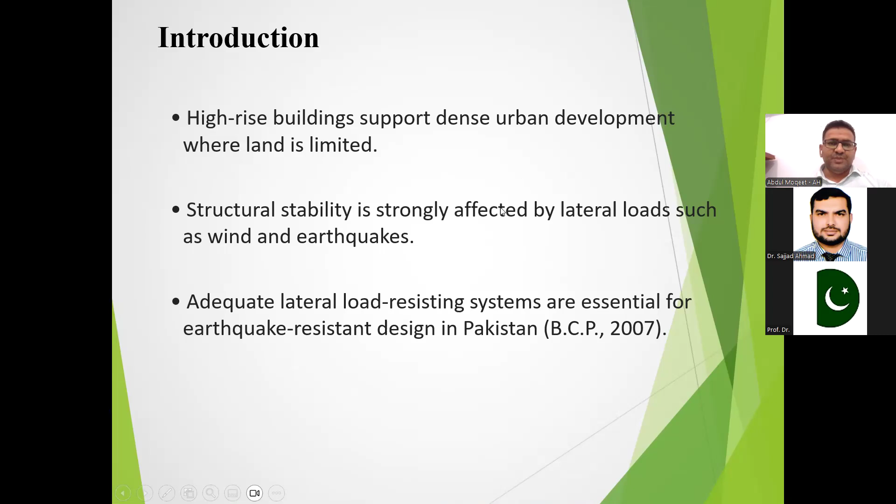If we talk about the history, in the past, the 2005 Kashmir earthquake and 2013 Balochistan earthquake caused too much destruction due to poorly detailed structures. The damage was identified as being caused by inadequate seismic detailing and weak lateral load resisting systems. So now for modern high-rise buildings, there is a requirement for systems like shear walls, bracing, and base isolation so that lateral loads can be resisted properly and transferred to the foundation. Their effects and patterns we will discuss in the next slides.

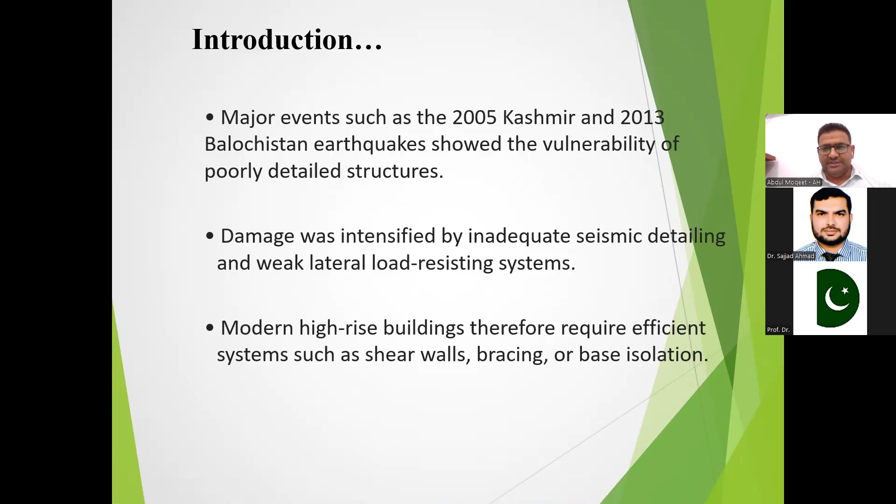Talking about other systems, the shear wall is the most efficient lateral load resisting element in high-rise buildings. They increase structural stiffness, strength, and seismic resistance. They reduce lateral displacement, interstory drift, and improve overall building performance against earthquake and lateral loads.

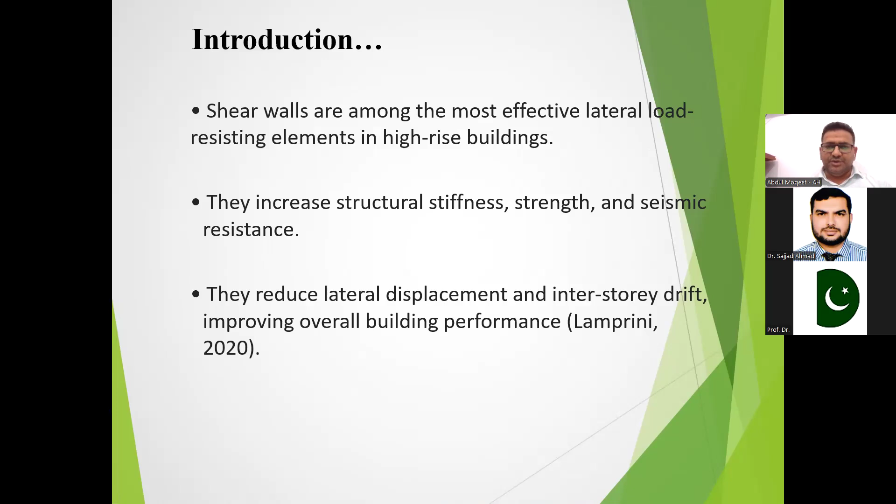The problem statement for my thesis is: this research addresses the critical need to identify the most effective shear wall placement to minimize structural vulnerability in high-rise buildings across different seismic zones.

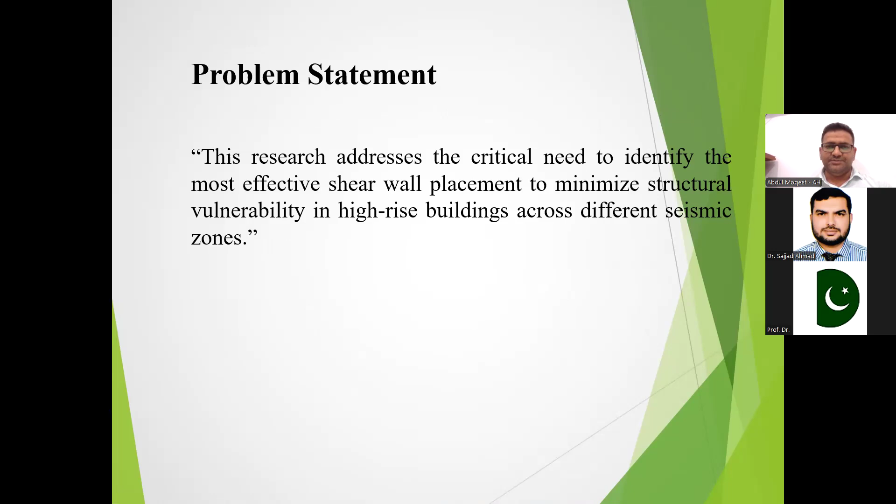There are three objectives. First, we will discuss the placement of shear walls, how they behave and how they react. Then there will be a comparison between all the shear walls in different seismic zones. Finally, there will be a practical recommendation for shear wall location after analyzing all the data.

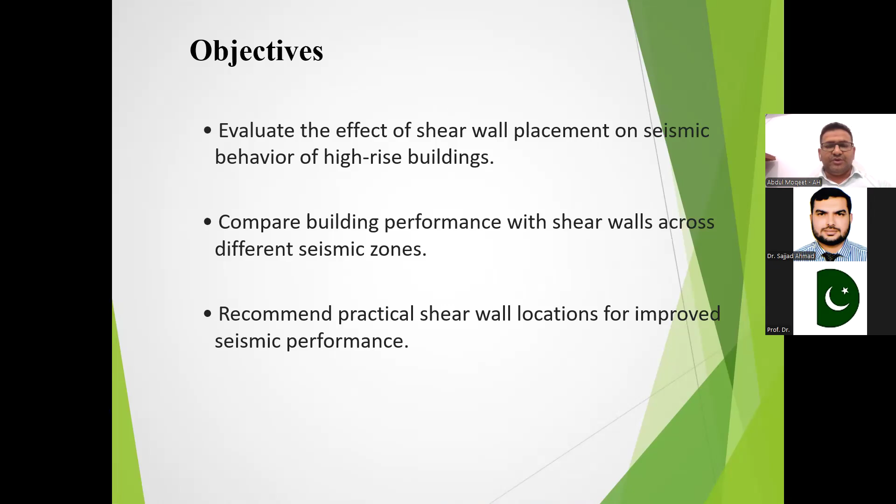If we talk about the shear wall, it is a structure from foundation to the top of the building that transfers the load to the foundation safely, so that there should not be any localized stresses. All stresses can be transferred to the foundation equally and in a proper way, so that there is no potential structural failure.

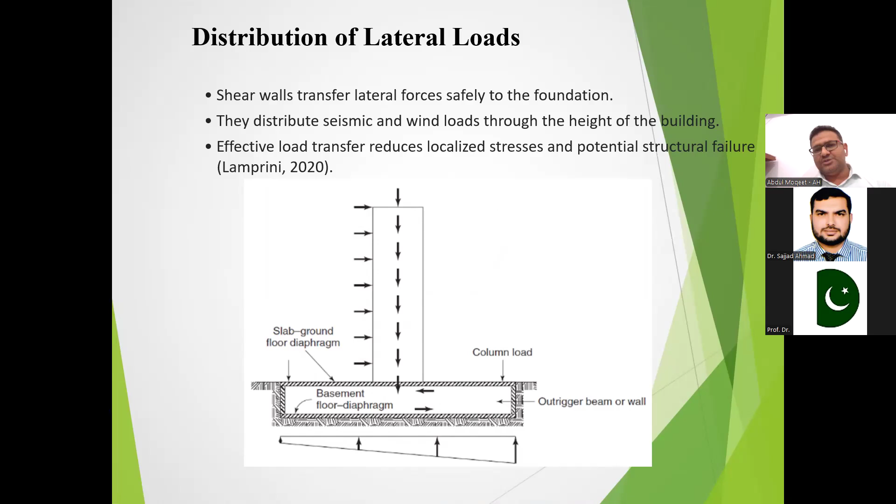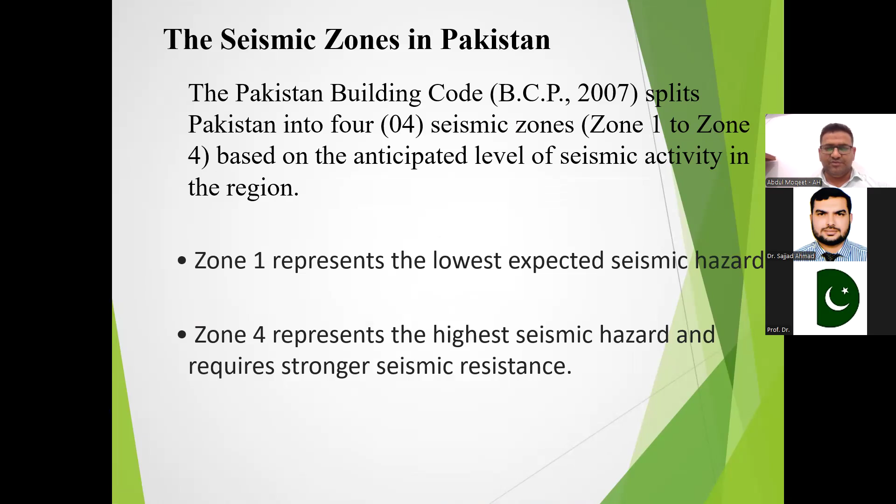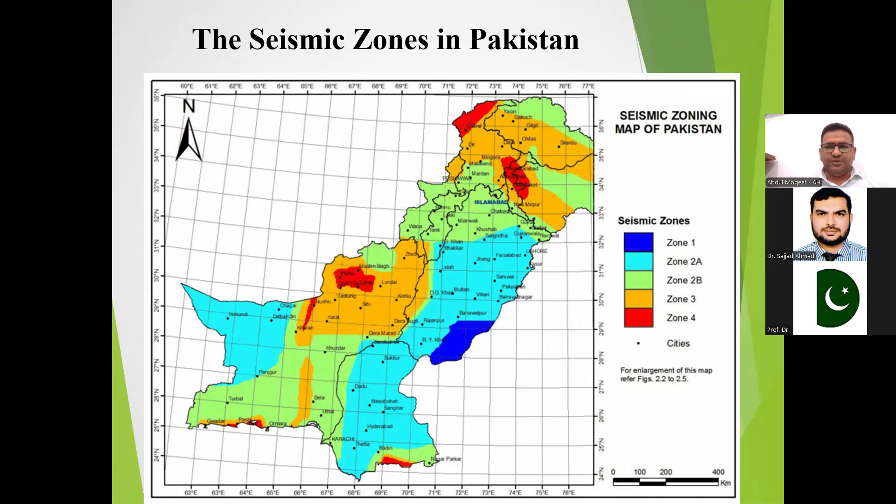Now, about the research methodology, these are the steps we followed. Firstly, we define the building geometry and materials, then define load combinations: ELF and RSA, equivalent lateral force and response spectrum analysis. Then we set seismic zone parameters for zone 3 and zone 4, run the analysis, and extract results for all parameters like displacement, drift ratio, overall drift, shear, acceleration, and stiffness. Then the analysis of results will be shared.

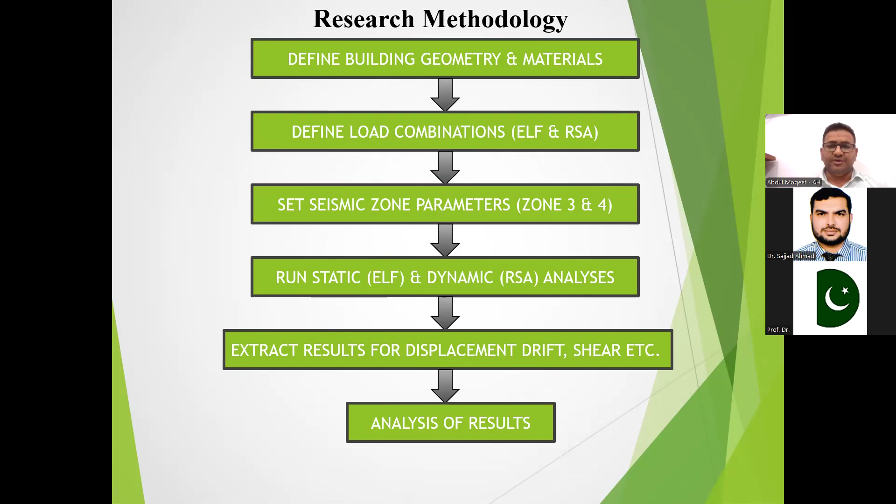Coming to our model: it was defined as a 10-story reinforced concrete building with a rectangular plan, 140 feet by 100 feet, as shown in the photo below. All grids are uniformly distributed in a 20 feet grid in the X and Y directions. Story height is uniform for comparison purposes, 11 feet, with a total height of 110 feet. Column size is 30 by 30 inches, beam is 15 by 24 inches. A rigid diaphragm was adopted for uniform lateral force distribution.

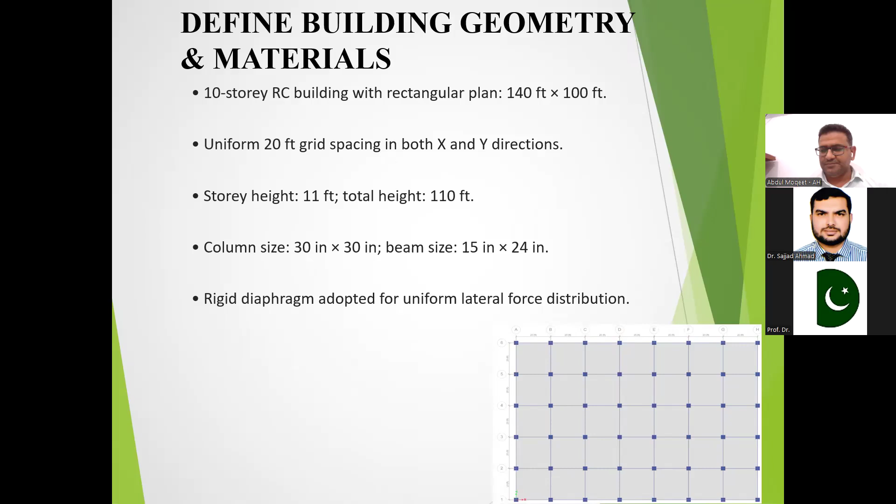These are the three combinations which we will discuss in later slides. The first one is the core shear wall, the second is the edge shear wall, and the third is the corner shear wall. This plan is from the ETABS models.

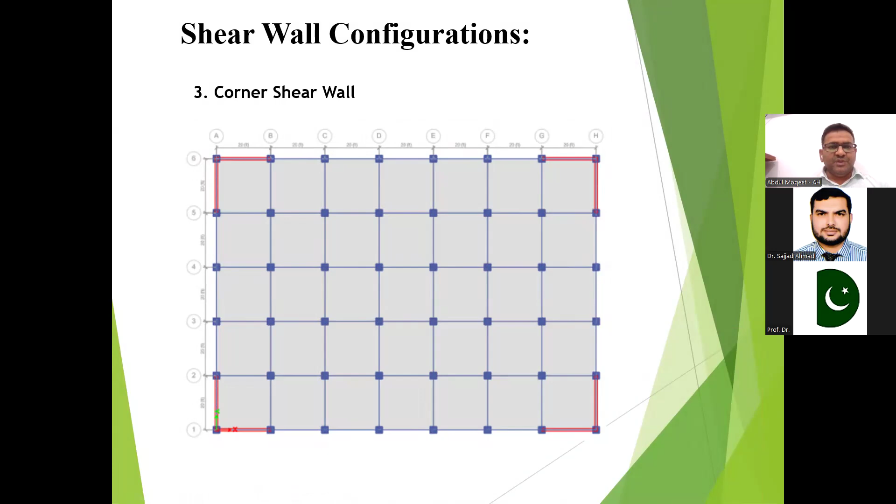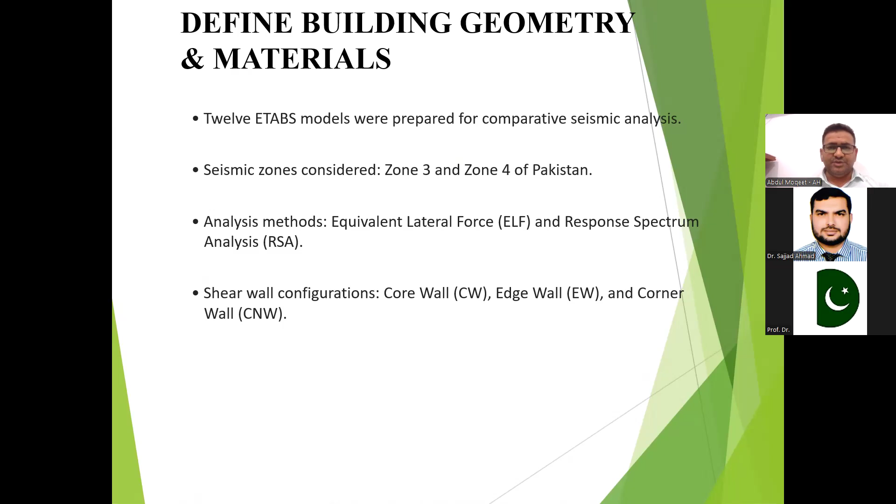So a total of 12 analyses will be performed for comparative seismic analysis. This is for the three combinations of core shear walls, as discussed previously, in two zones of Pakistan, zone 3 and zone 4, using two analysis methods: equivalent lateral force method and response spectrum analysis. All these combinations give us 12 total: first three for zone 3 ELF, next three for zone 3 RSA, then zone 4 ELF, and then zone 4 RSA. Total of 12 structures we will be discussing now.

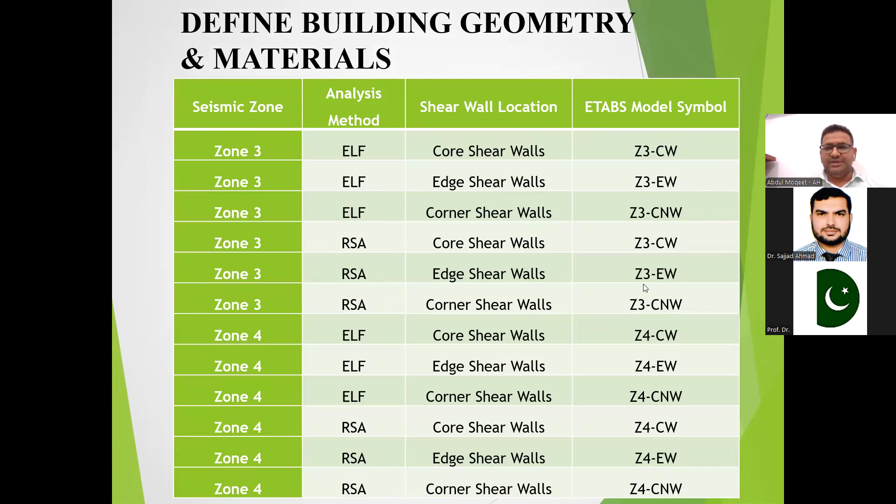Now for the ETABS model, firstly for the equivalent lateral force, ELF, method. Brief introduction: ELF is a simplified static method for estimating seismic lateral forces. Base shear is calculated using CA, the acceleration coefficient, CV, the velocity coefficient, structural weight, and importance factor for this type of building. From an analysis point of view, we have taken importance factor as one, and response modification factor, which ranges from 3.5 to 8.5 - we are taking 8.5 for this one. Forces are distributed to stories according to height and mass, and 5% accidental eccentricity is included to account for torsional effects.

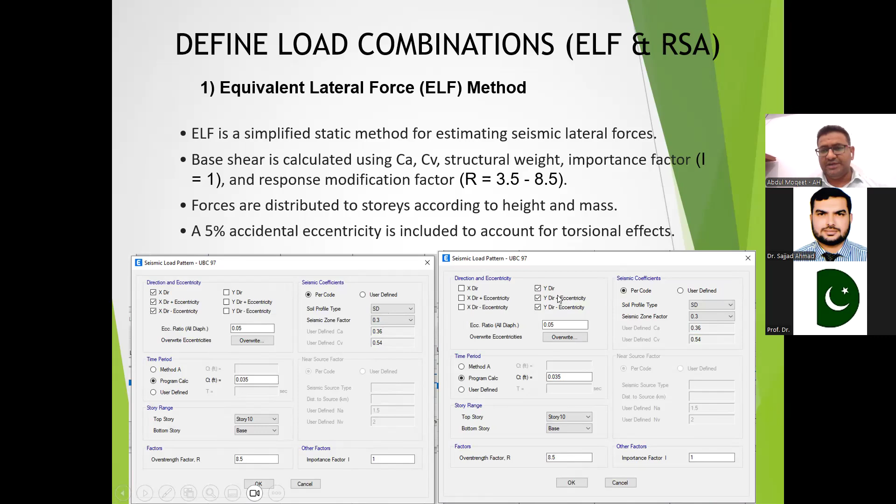Below are the screenshots from ETABS showing all the values: firstly for the X direction for zone 3, soil type SD, with eccentricity ratio 5%, overstrength factor 8.5, importance factor 1. The second is for the Y direction, same for zone 3, then X direction for zone 4, and then Y direction for zone 4. And then we have load case data for EQX and EQY.

Next we'll go to the other definition, response spectrum analysis, RSA. RSA is a dynamic analysis method based on modal response of the structure, like vibration, and CQC patterns which ETABS uses. Natural frequencies and mode shapes are evaluated for seismic response. As per UBC 97 response spectrum parameters, the same values for CA and CV will be applied to have consistency and to compare the values.

Modal combination uses the complete quadratic combination, CQC, method to handle closely spaced modes as generated by the model, and directional combination uses square root of sum of squares to incorporate multi-directional effects. Apart from that, 5% modal damping and 5% accidental eccentricity are included, and RSA gives a more realistic picture of building performance under actual dynamic loading conditions, as it considers time, acceleration, and modal analysis. The orthogonal effect is also considered at 33% of the perpendicular direction, rather than just one direction, which is why it gives a more realistic approach to the model analysis.

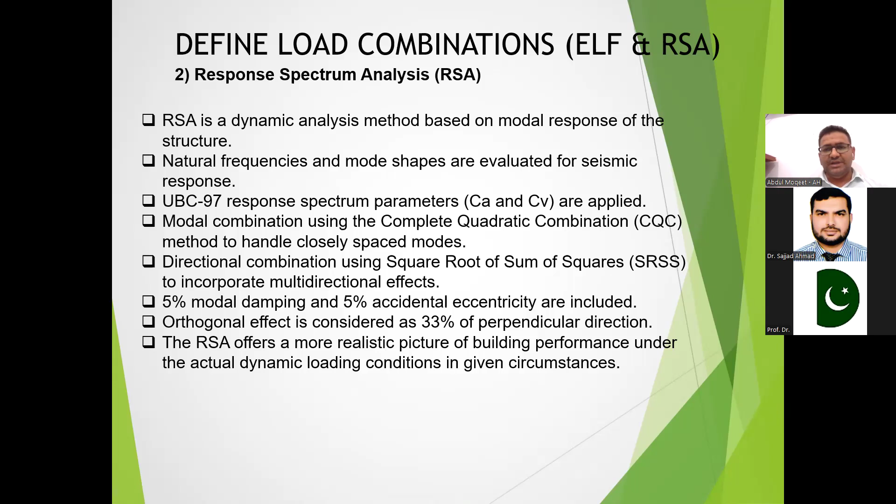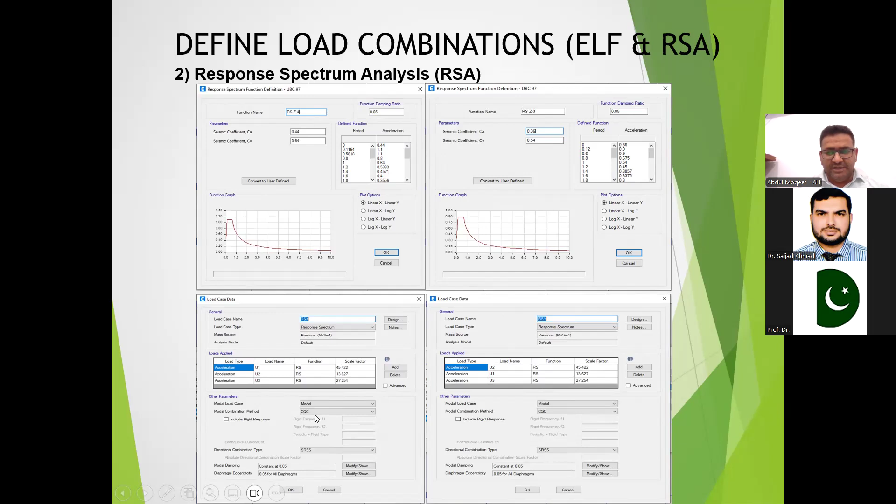So to put the values of RSA into the system, the same values of CA and CV are used for zone 4, and for zone 3 this is generated, and then we come to load cases. Three modes are generated here, U1, U2, U3, with the same CQC pattern as per the software.

Then we go for mass source and load pattern configuration. Load pattern is calculated with dead load taken as 1 and live load as 0.25, reduced live load for the mass source. Applied load factors are used to calculate the mass distribution within the structure. Load pattern application is vital to accurately model the seismic response of the building under both equivalent load and response spectrum analysis - these are the factors we use to equally distribute the load in both ELF and RSA analysis.

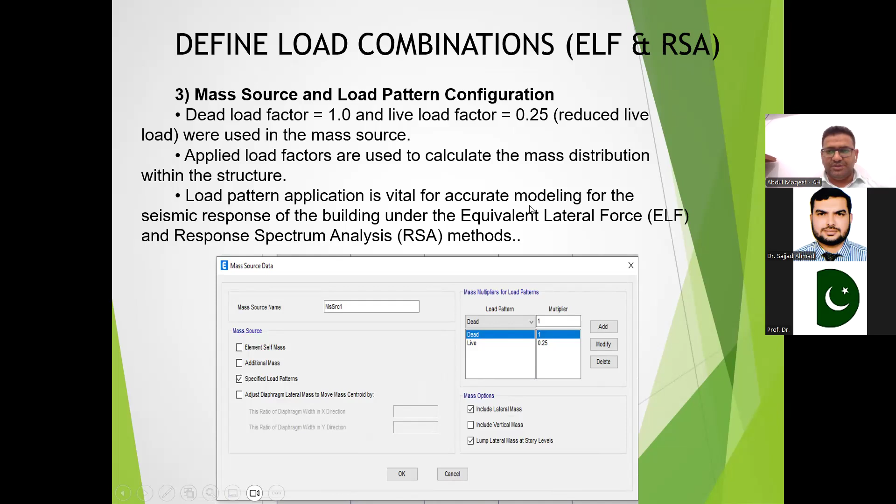Now for the seismic zone parameters: as discussed earlier, zone 3 and zone 4 will be used as per UBC and BCP seismic parameters. CA, as highlighted before, presents the acceleration coefficient, and CV presents the velocity coefficient. For soil type, from a generic point of view, we have chosen the same SD stiff soil, exposure type B, so all parameters remain the same while analyzing the different combinations. Seismic parameters directly influence both ELF and RSA results by altering base shear, acceleration, modal properties, and stiffness - each of which we will discuss in the next slides. These are the values we are choosing.

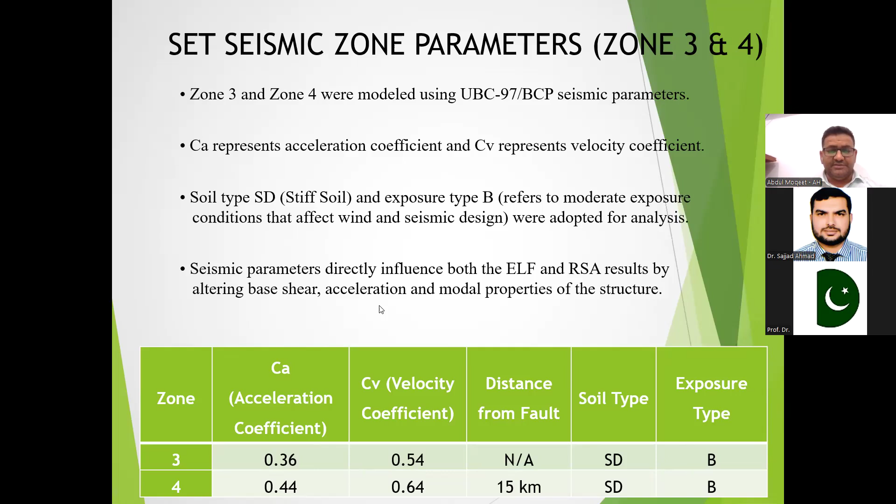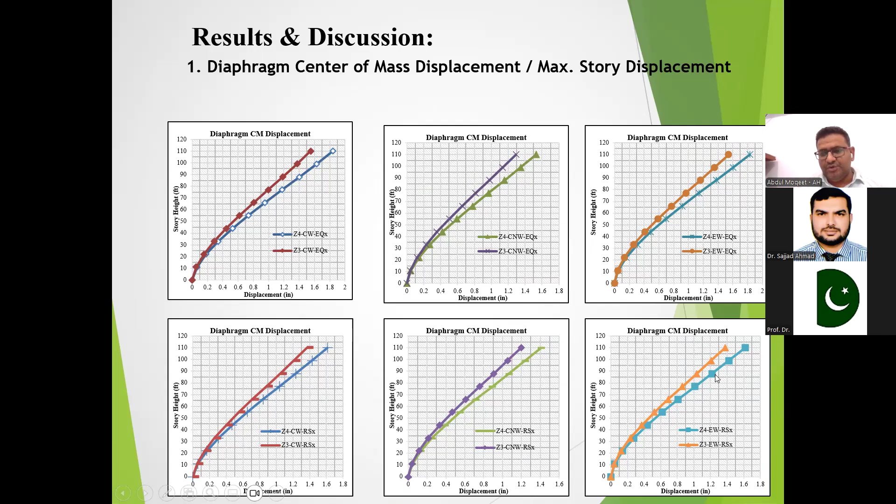Zone 4 is showing more displacement. For this one, same zone 4 is showing more. For edge wall in RSX, the blue line is showing more displacement. So these are all the combinations we have generated.

I will explain briefly for this one. As per our analysis, we understand that corner wall is showing very less displacement. So whenever we compare the corner wall with the other walls, for example this corner wall, the green line is showing less displacement. Even in zone 4, if we compare two walls, corner wall and CNW, corner wall is still showing less displacement.

If we compare all the zones, zone 4 CNW RSX and zone 4 CNW EQX, it is showing less displacement. These are all the combinations which we compared with different zones and different core walls. So in general, we can say corner wall is showing less displacement.

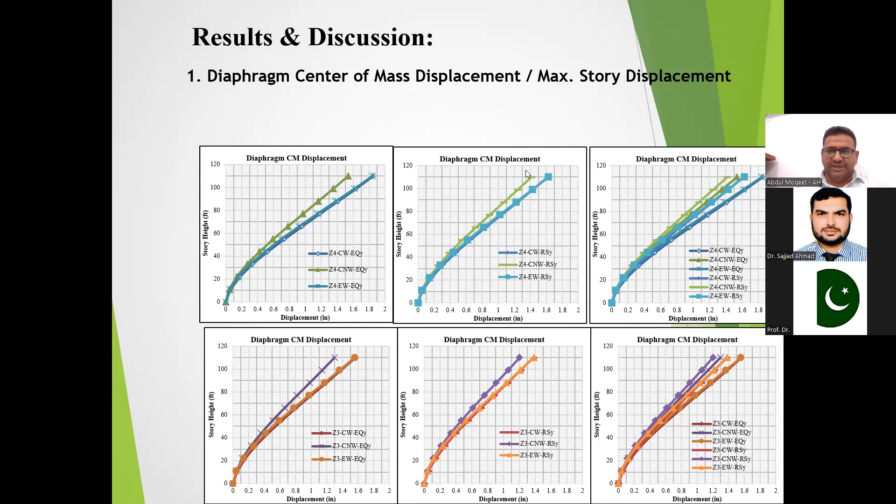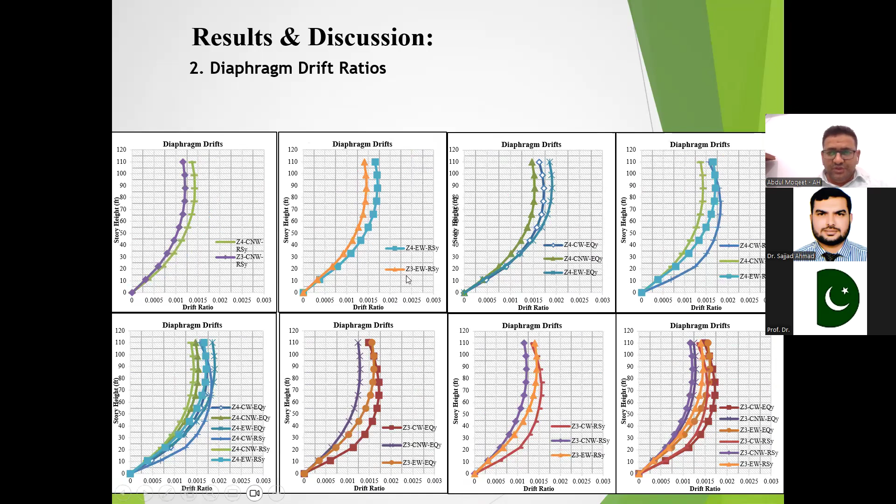For the next chart, this blue line, Z3 corner wall, again shows the corner wall has a low drift ratio. And randomly, we can check all the charts. We will discuss all this calculation in the later slides. So these are all the charts, and randomly we can discuss this one.

Now for the story drift. Story drift is also the same response as drift ratios. Again, we can see in comparison to zone 3 and zone 4, zone 3 has less drift and zone 4 has more drift. We'll go and discuss these patterns in the next slides.

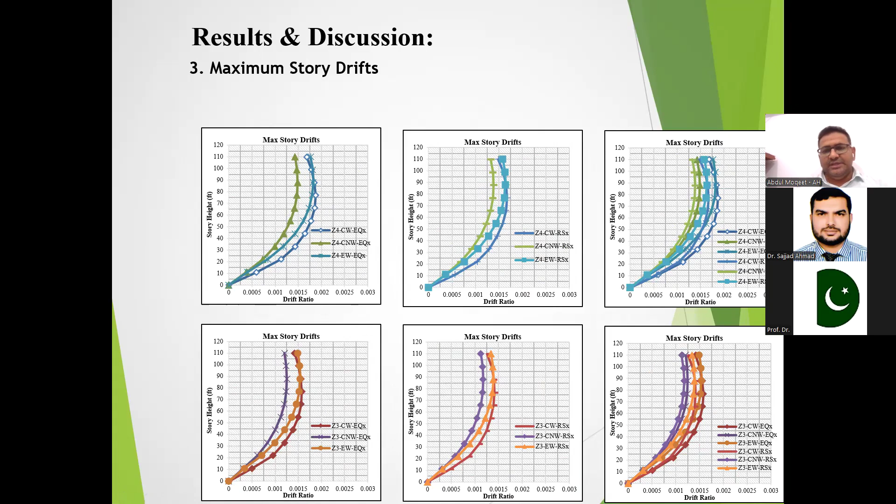If we compare zone 4 across all the walls here, we can still see corner wall is showing less drift. So in the drift calculation also, corner wall is showing a more favorable response. And obviously, when there is less displacement and less drift, the stresses will be more. This we will discuss in the next slides.

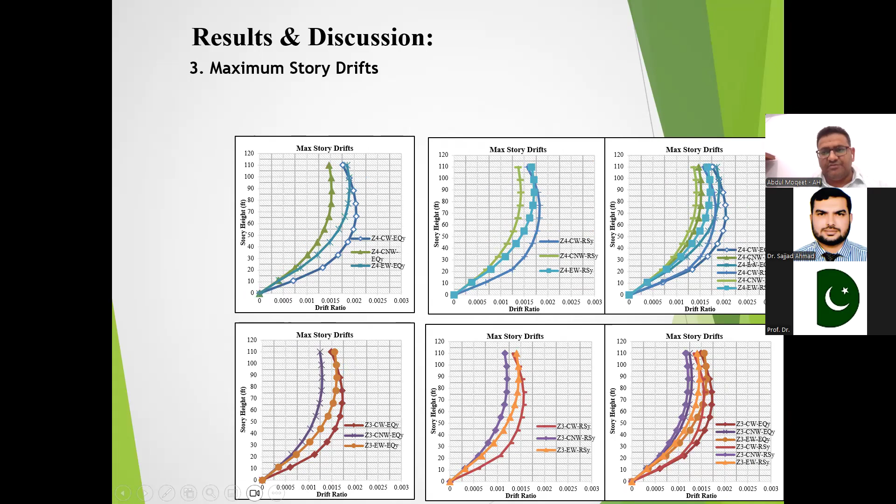So again, this story drift, all the combinations are here. We can discuss in the next slide. For example, if we compare all the walls here in EQX, EQY, and RSY direction, we can still see the corner wall is showing less drift for this green chart line.

Then we discuss story shear. Story shear is inversely proportional to displacement. As we discussed, corner wall has less displacement, so corner wall will have more shear and ultimately more moment in the base. As we compared the zones, zone 4 has more shear, zone 3 has less shear. We will go to the next slide to cover this.

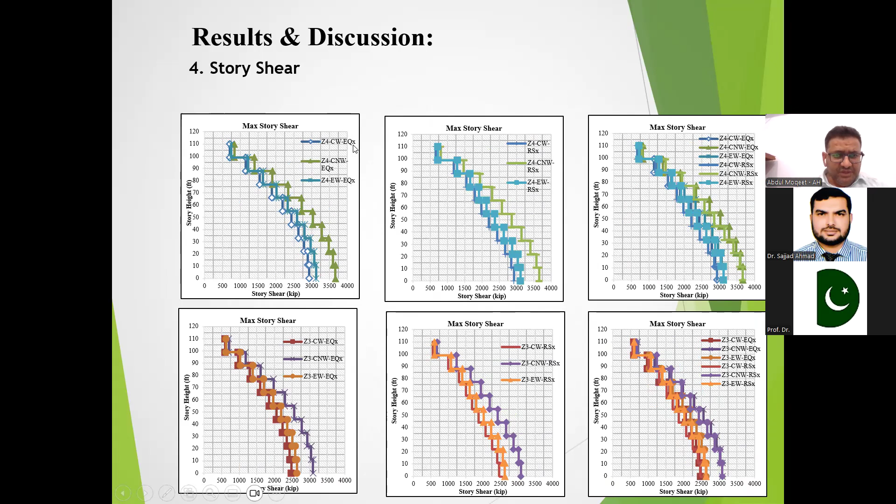For example, now if we are comparing zone 4 with all three walls in EQX analysis, we can see the core and corner wall has more shear, less displacement, more shear. Now we will quickly go to the next chart.

For example, here in zone 3, again we can see the core and corner wall, this purple color line, Z3, will have more shear. We will discuss all this analysis one by one in the next slides.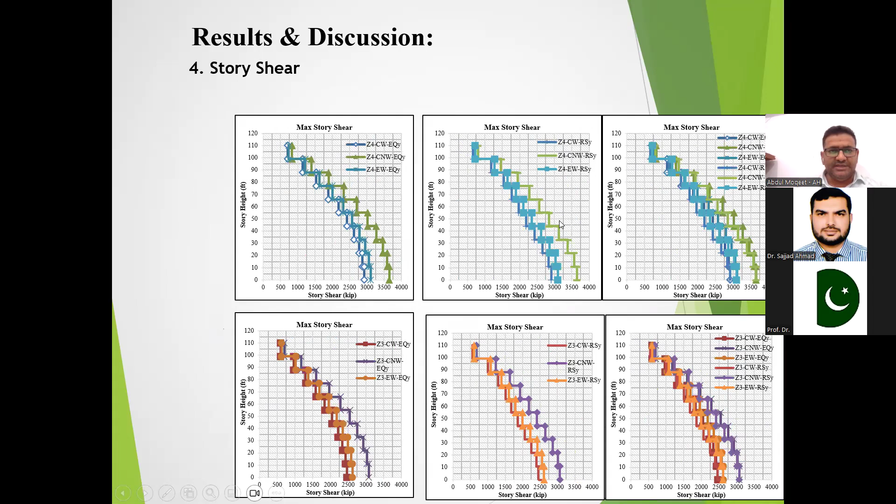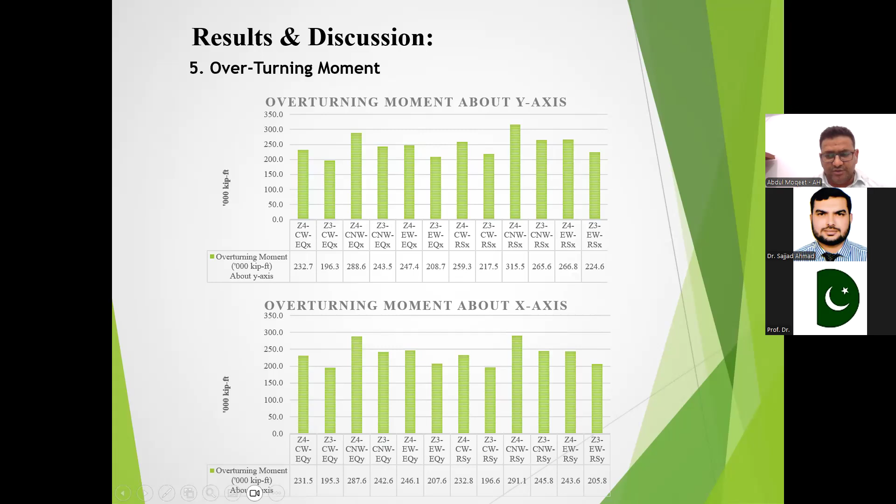Now we'll go to the next part, overturning moment. As I discussed, the corner wall is more stiff, less displacement, so it will have more shear and more overturning moment. Here we can see core and corner wall in response spectrum giving the maximum shear of 315, and the core wall giving the minimum shear here, core wall EQX 196. Also in the X direction, corner wall RSY is 291 and core wall EQY is 195.

Now we'll talk about story stiffness. Because of less displacement and the most efficient behavior of the corner wall, story stiffness of corner wall will be more than all others. For example, if we compare zone 4 corner wall, this red color line shows more stiffness. Also for zone 4 in the Y direction, again we have more stiffness in the corner wall.

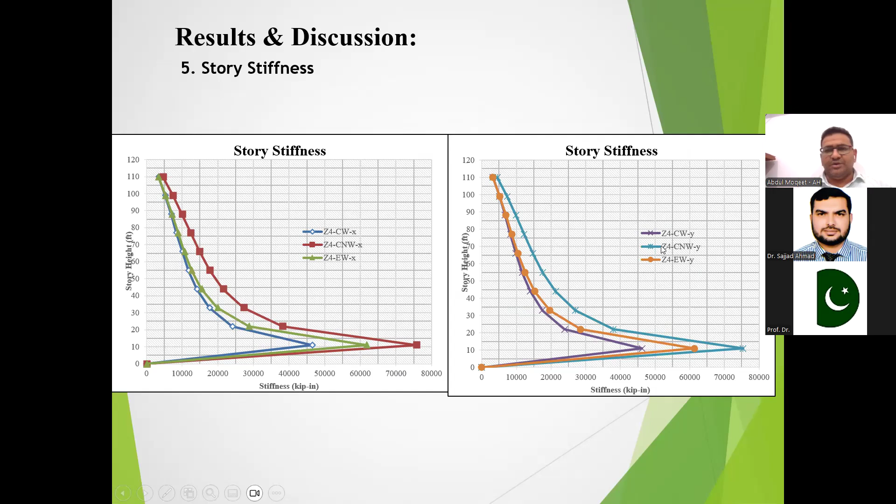If we talk about story acceleration, for the corner wall, if the displacement is less, story acceleration will be more. If we compare all zones, zone 4 and zone 3, for all walls—core wall, corner wall, and edge wall—this green color line, core and corner wall, will have more acceleration. If we compare the zones, zone 4 will have more acceleration than zone 3. Generally, zone 4 has more acceleration or higher values than zone 3.

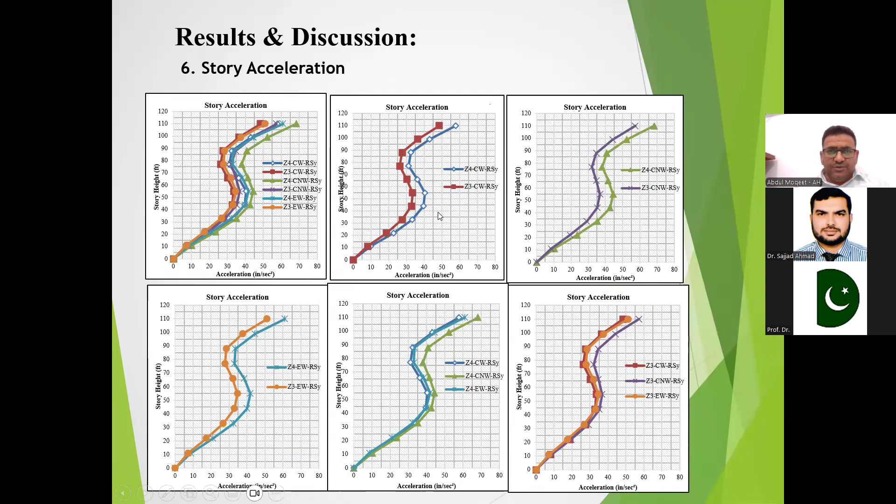So we'll go to the next slide. For acceleration, all the comparisons are here. We will discuss this later on.

Finally, for modal participation, if we talk about the time period, because of stiff behavior and less displacement, corner wall has very little time period compared to the core wall, which being a flexible or less stiff system shows more time period, 1.53. Edge wall behaves almost intermediate between these two. Most critical is that the core wall shows the mode shape as a torsional behavior moment, while the corner wall and edge wall show linear behavior in one direction.

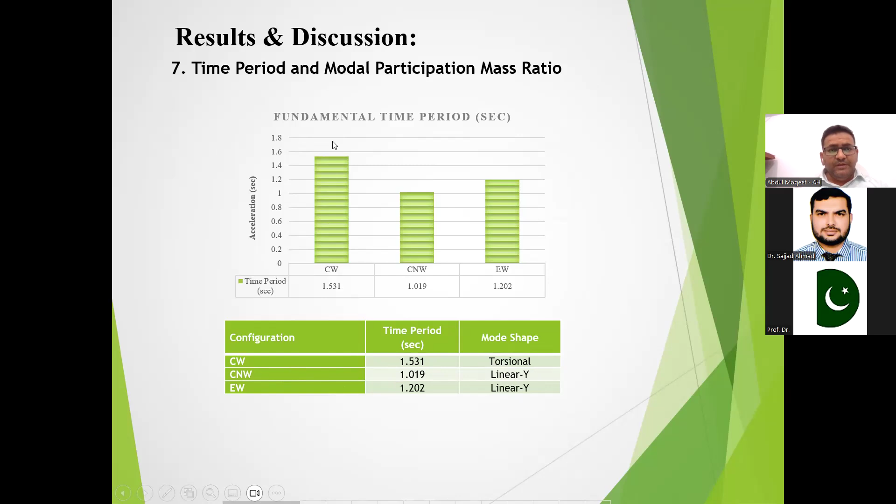So these are all the values from the software for time period calculation, modal participation, mass ratio, and then we will go for the discussion.

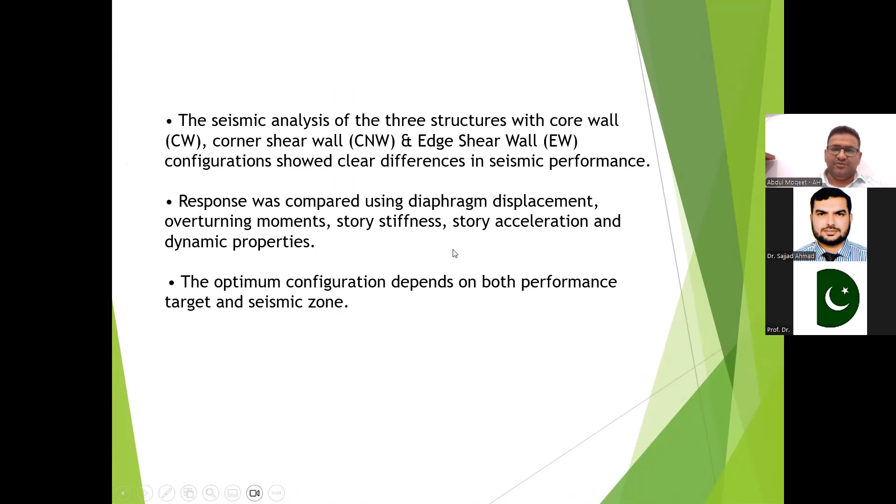As we discussed already, the seismic analysis of three structures—core wall, corner wall, and edge wall—shows a clear difference in seismic performance. Response was compared for diaphragm displacement, overturning, story stiffness, acceleration, and dynamic properties. Optimum configuration depends on both performance target and seismic zone; obviously it changes with the seismic zone every time.

Now, one by one, key findings: for center of mass displacement, as discussed, the corner wall gives the lowest lateral displacement in all seismic zones, zone 3 and zone 4, and also the load cases EQ and RS. Edge shear wall shows the highest top story displacement, and core wall provides intermediate results. So ranking from best to worst: first corner shear wall, then core wall, then edge wall.

Maximum displacement occurs at the roof level. For all cases, it is almost the same—maximum displacement is at the top level because of the cantilever arrangement, and it decreases towards the base.

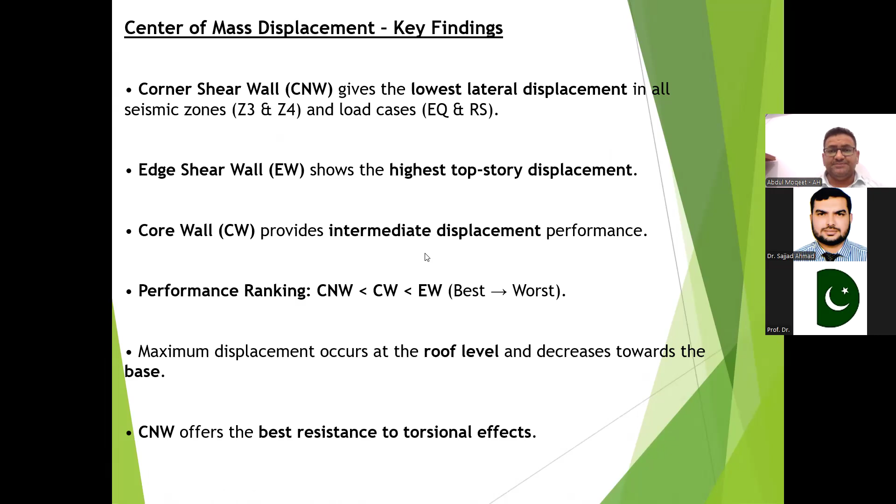Corner wall offers the best resistance to torsional effects, while core wall and edge wall exhibit greater torsional coupling, especially under response spectrum analysis. Zone 4 produces higher displacements than zone 3 due to stronger seismic forces, and response spectrum analysis generally predicts higher torsional effects than equivalent static analysis.

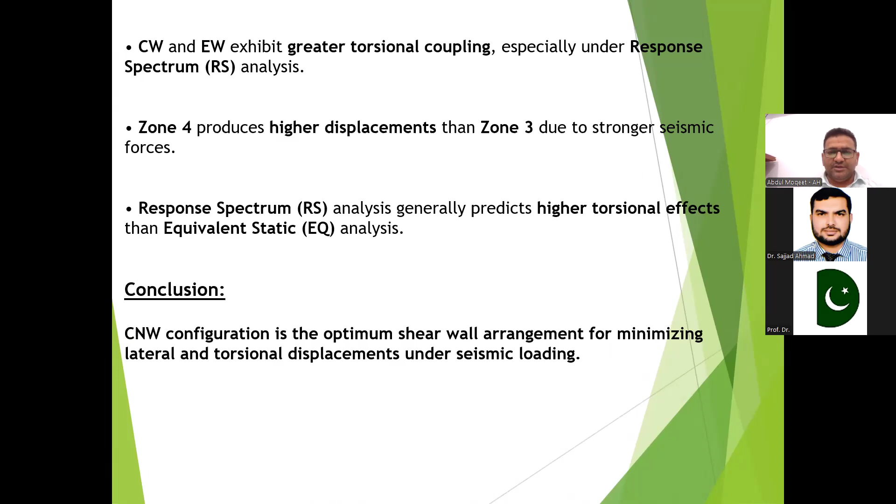That is why we are comparing both analysis methods, and response spectrum will be the most efficient one in calculating the actual response of the building. So in conclusion, for this typical displacement type, we can say the corner shear wall (CNW) configuration is the optimum shear wall arrangement for minimizing lateral and torsional displacement under seismic loading.

Then we can talk about the base overturning moments. It will be reverse, obviously. The results show an inverse relationship between lateral displacement and base overturning moments. So corner shear wall, being the stiffest system with minimum displacement, ultimately gives the highest base overturning moment and also the highest base shear. The core wall, the most flexible system as discussed earlier, experiences the lowest overturning moment. Edge shear wall shows intermediate overturning moment demand between core wall and corner wall.

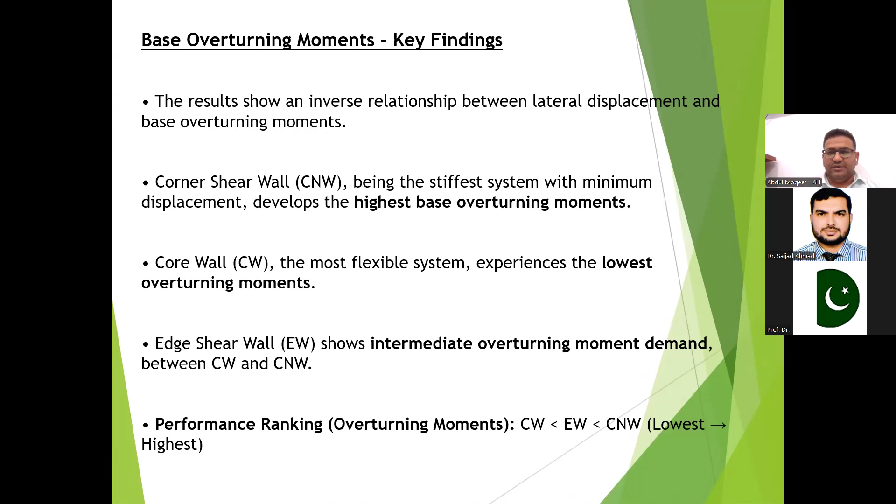So in performance ranking, from lowest to highest: firstly the core wall is the lowest, then intermediate edge wall, and then the best one is corner shear wall. So a stiffer system attracts higher seismic forces, as discussed already. The corner shear wall was the stiffer one, that is why it is attracting more seismic forces, resulting in increased base moments. Maximum overturning moments consistently occur at the base of the structure.

Zone 4 produces obviously higher overturning moments compared to Zone 3 due to stronger seismic loading, and response spectrum analysis generally predicts higher overturning moments than equivalent static analysis due to higher modes. So for the conclusion of this topic, CNW configuration attracts the highest base overturning moments due to its high stiffness, while core wall attracts the least. This confirms that stiffer systems resist deformation but attract greater seismic force demand at the base.

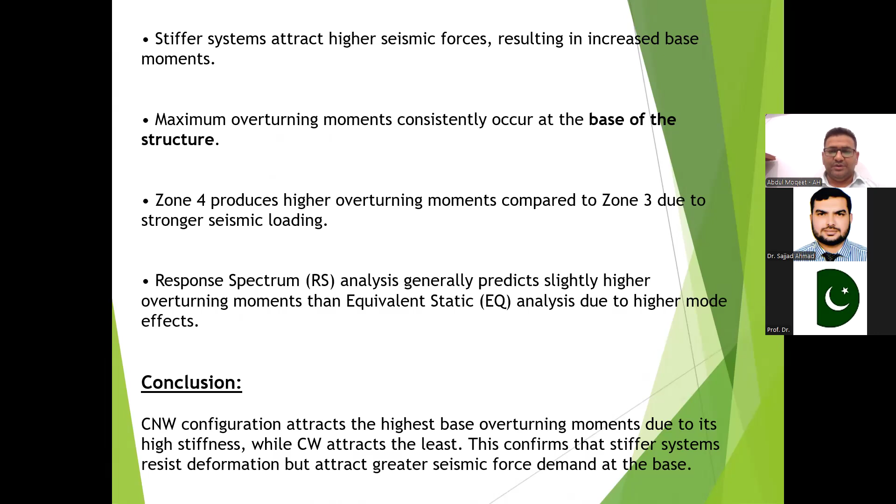So in this category, designers, when designing, must consider the forces and moments at the base of the building.

Now if we talk about stiffness, as discussed already, the corner wall has more stiffness, as shown in the charts before. So story stiffness shows a consistent trend across all building heights and both principal axes. Corner shear wall configuration provides the highest lateral stiffness for all story levels, and core wall is the lowest stiffness, as already discussed. Edge shear wall system shows intermediate values in almost all cases.

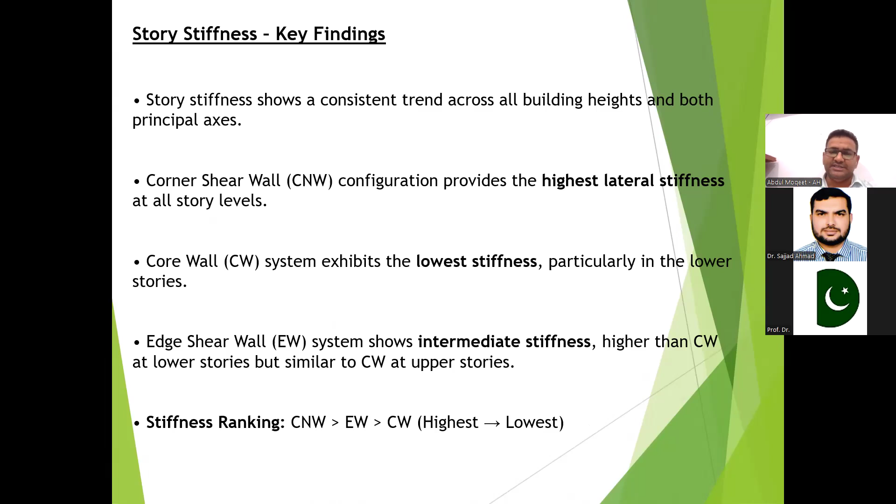In the end, I will show one comparison table also, which will illustrate all the previous discussion and make it easy for us to understand. So stiffness ranking in this case from highest to lowest: corner wall will have the highest stiffness, then the edge wall, and then the core wall.

So story stiffness decreases with increasing height. Obviously this is the cantilever portion, so this holds for all configurations, indicating typical structural flexibility at upper floors. CNW is most effective in resisting lateral distortion due to its superior stiffness, and the stiffness distribution remains relatively balanced along the principal X and Y axes for all configurations. So in all X and Y directions, it was almost balanced, so for our symmetric building there was no big problem or big value difference for this one.

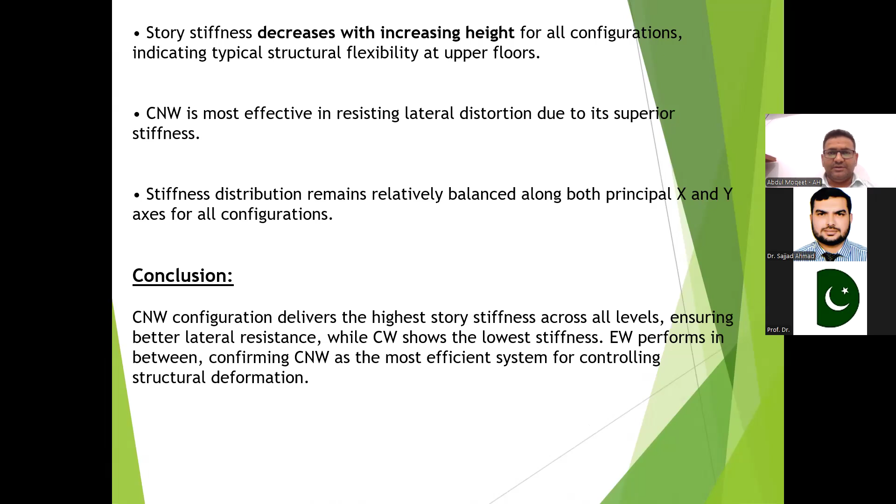So in conclusion of this one, CNW configuration delivers the highest story stiffness across all levels, ensuring better lateral resistance, while core wall shows the lowest stiffness as discussed already. Edge wall performance is almost intermediate between these two, and this should be evaluated later in all the combinations if required.

Then story acceleration. Story acceleration for a good analysis or design of a building should be less, and in our case the corner shear wall is giving less acceleration. We will see the points one by one to strengthen our idea.

So story acceleration and the response spectrum loading are distributed inertially along the building height. Corner shear wall configuration shows the highest story acceleration because of its less diaphragm movement, so it has more acceleration especially at the roof level. Core wall configuration results in lower top story acceleration because core wall is a flexible system compared to the other two, so it is showing, you can say, damping resistance - very low acceleration. The edge shear wall configuration produces intermediate acceleration values between core wall and corner wall.

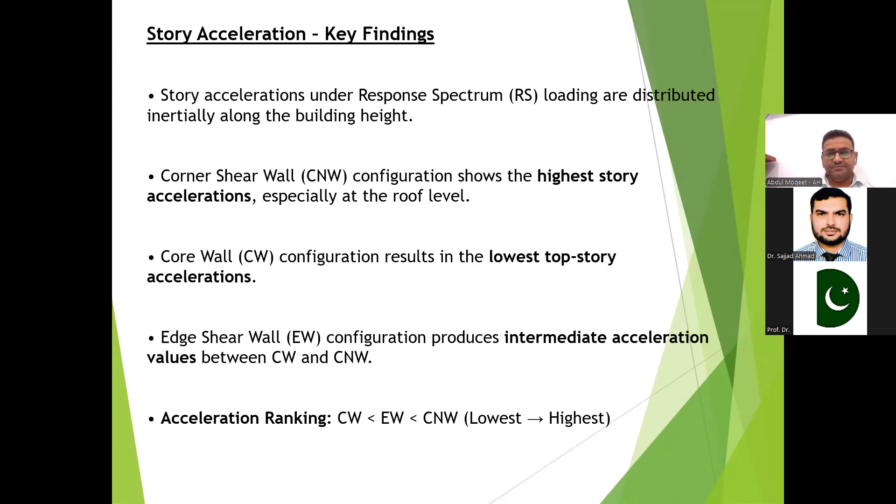So if we mark acceleration ranking, the lowest will be for core wall, then intermediate will be edge wall, and the maximum acceleration will be for corner wall. The trend aligns with stiffness behavior.

Stiffer systems transmit higher acceleration, as we discussed already. The corner wall is providing less movement, being more stiff, so that is why it is attracting higher accelerations at floor levels due to reduced flexibility.

Acceleration variation is non-linear along the height, behaving with localized peaks influenced by modal effects, as in the response spectrum model. Zone 4 consistently shows higher acceleration compared to zone 3 due to stronger seismic intensity.

So in conclusion, the CNW configuration experiences the highest story acceleration due to its high stiffness, while on the other hand CW does not. The results confirm that stiffer systems transmit greater inertial response to upper floors under seismic loading.

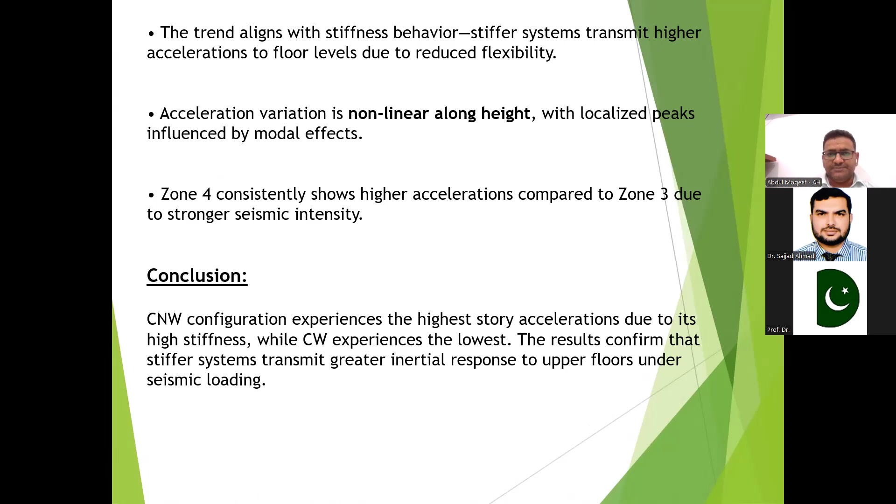Modal analysis provides insight into the fundamental dynamic behavior of the structure under seismic loading, comparing the models and their time periods. We can say that the CNW configuration has the shortest time period and highest frequency because it is the most stiff structure in our comparison.

The core wall has the longest time period because of its flexibility. The edge wall is again behaving as an intermediate. So ranking from shortest to longest time period: CNW, EW, and CW.

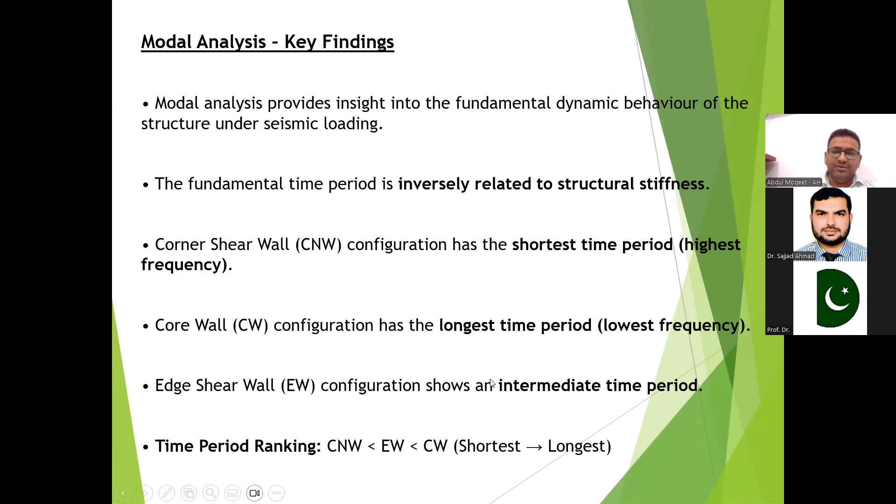The core wall system's fundamental mode is primarily torsional because it is not very stiff. As we discussed in the previous table, it is not showing linear behavior but torsional behavior, indicating higher susceptibility to twisting.

So the core wall will be more susceptible to twisting, while CNW and EW give translational mode in the y direction, a linear mode. Modal mass participation confirmed that translational modes dominate earlier in CNW and EW systems, while CW is governed by torsional response. The distribution of modal contributions explains the differences observed.

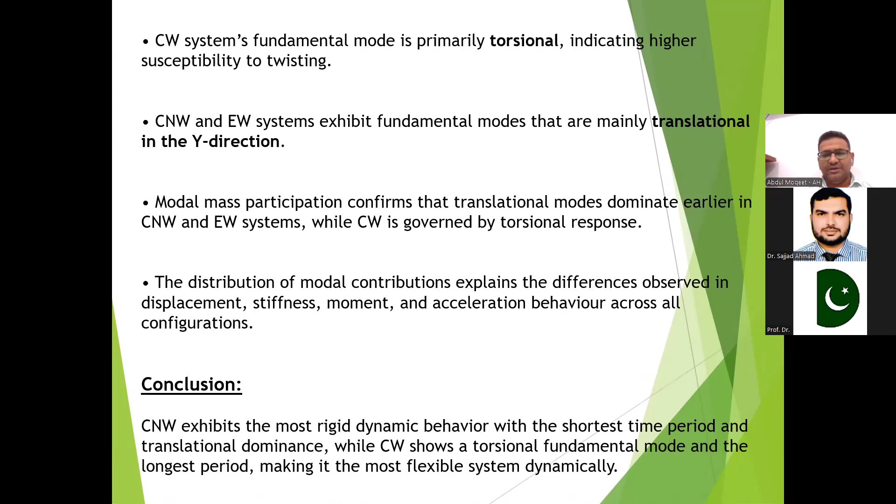So all these give us differences in displacement, stiffness, moment, and acceleration behavior. In conclusion, the corner wall exhibits the most rigid dynamic behavior with the shortest time period and translational dominance, while the core wall has torsional fundamental behavior and the longest period because it is flexible.

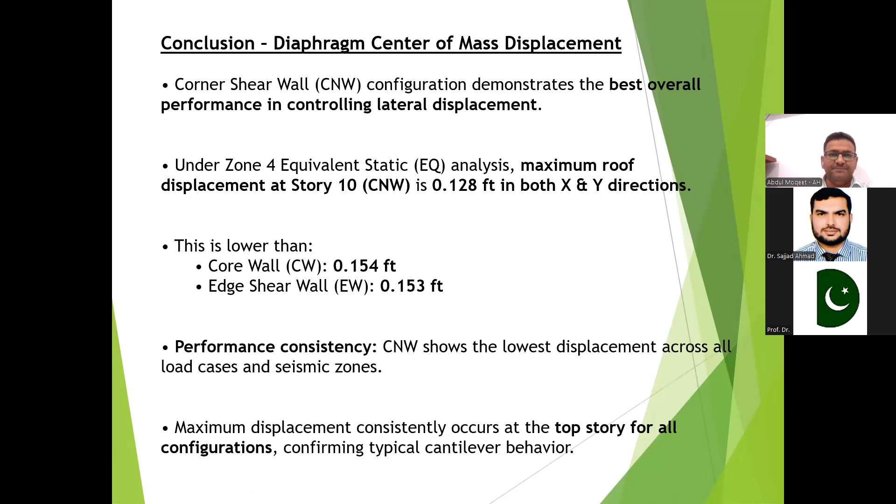For performance consistency, the corner wall shows the lowest displacement across all seismic cases and load cases. Maximum displacement consistently occurs at the top story, as discussed, and displacement increases with height for all systems. The corner wall shows superior torsional rigidity because of its rigid characteristics and lower out-of-plane displacement on response spectrum analysis.

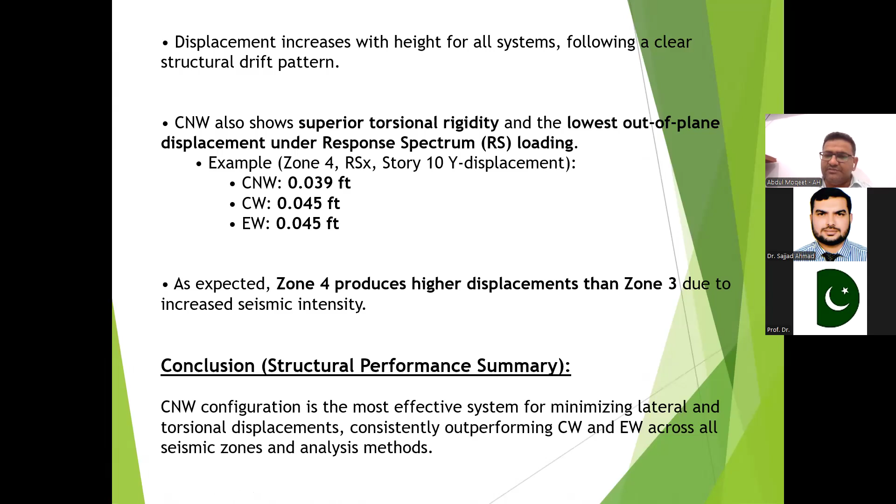These are the values taken from the model, and zone 4, as discussed already, produces higher displacement. So in conclusion, the CNW configuration is the most effective system for minimizing lateral and torsional displacements compared to CW and EW.

For overturning, the key finding is that an inverse relationship is observed between displacement and base overturning moment. These are the values we can see: CNW has less displacement but the maximum moment.

So the moment ranking is like this: CW, edge wall, and corner wall. The corner wall attracts higher seismic base forces due to its higher stiffness and rigidity.

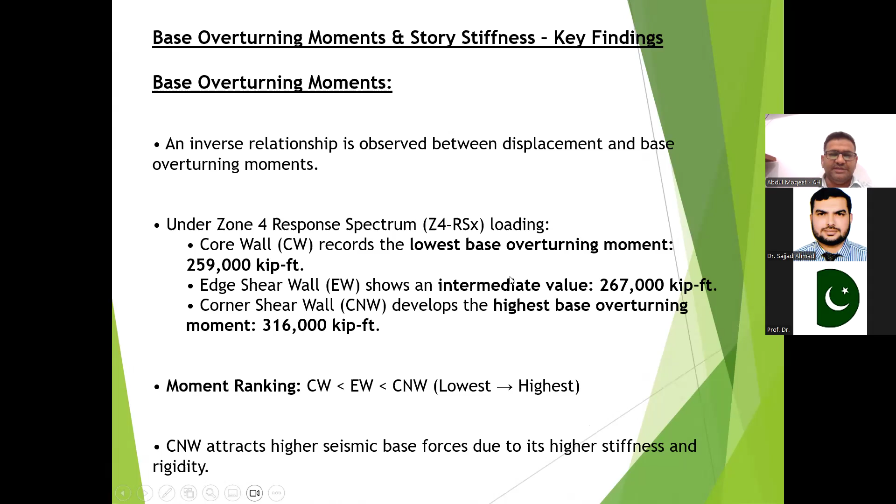The story stiffness is also similar: for the corner wall, story stiffness is maximum in both X and Y directions compared to the other two. So story stiffness for CW is less than EW, and CW... the corner wall is the maximum one.

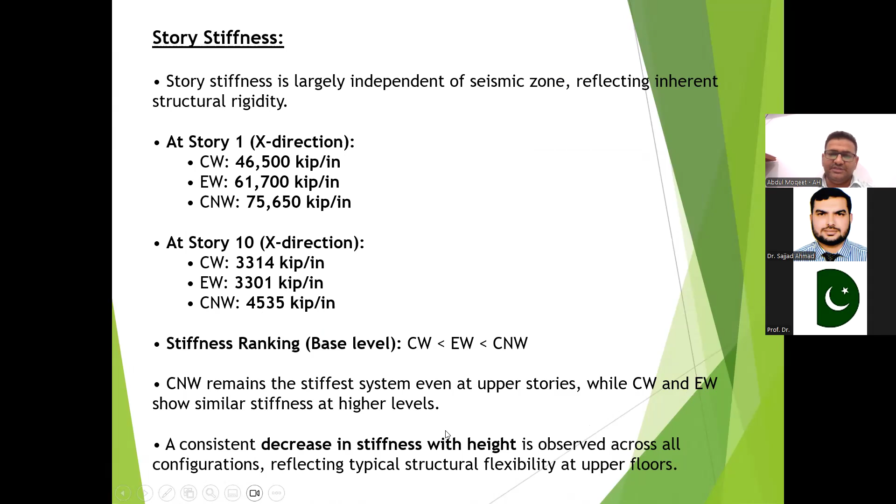So the corner wall remains the stiffest system even at the upper stories. As we discussed, there is a consistent decrease in stiffness with height because it is acting as a cantilever.

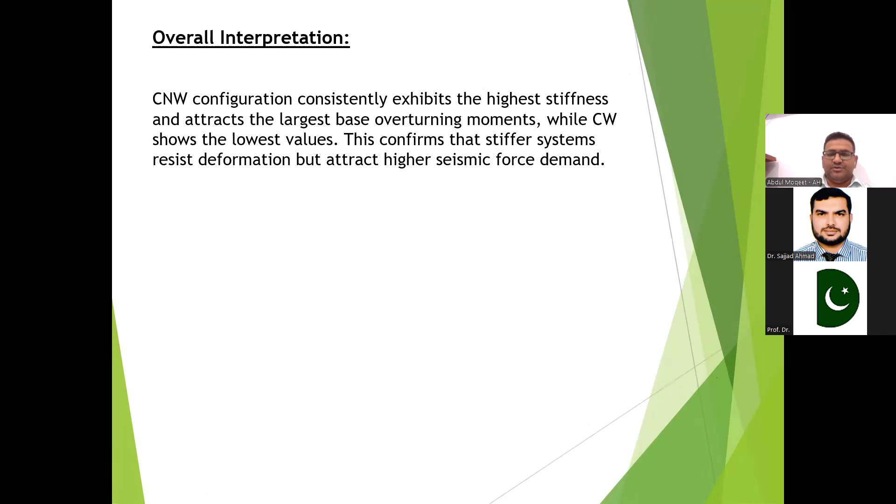So the overall interpretation is that the CNW configuration consistently exhibits the highest stiffness and attracts the largest base overturning shear and moments, while the core wall has a totally different reaction in this case.

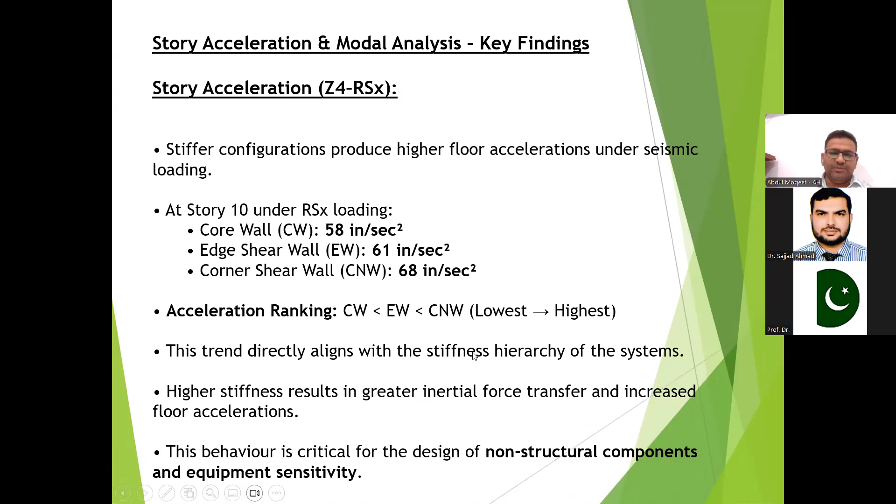In the modal analysis of time period, as discussed already, the core wall, because of being a flexible system, has the maximum time period, and the corner wall, because of more stiffness, has the least time period.

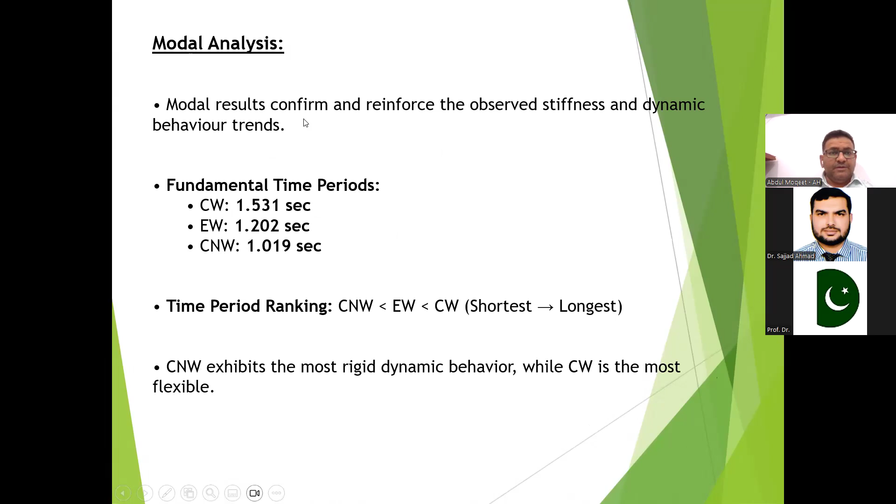So these are the values we've taken, which strengthen the overall discussion before. Modal participation results confirm that the core wall is governed by torsional dominance response, and CNW and EW are governed by translational motion in the y direction, as we discussed already. Overall, CNW corner wall exhibits higher stiffness, shortest time period, and highest acceleration, while core wall shows the opposite behavior with greater flexibility and torsional dominance. This confirms the consistent correlation - both are behaving inversely proportional.

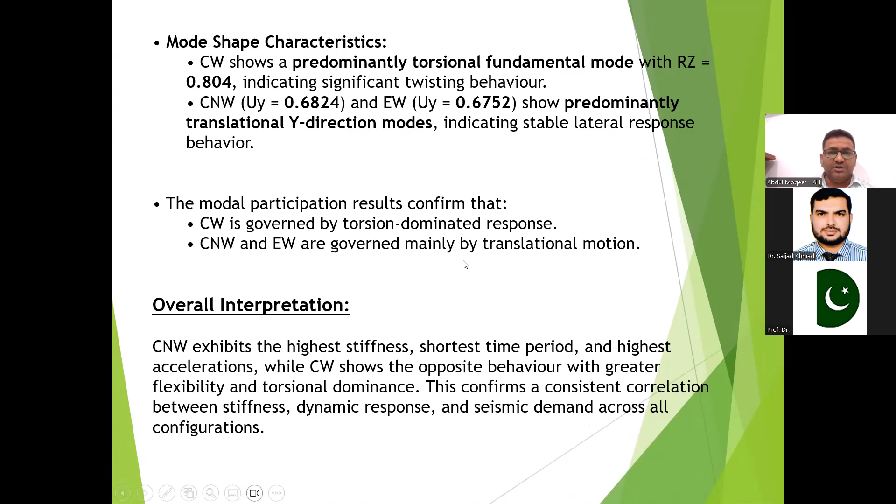So consistent correlation between stiffness, dynamic response, and seismic demand across all configurations. Overall conclusion, as discussed already: CNW corner shear wall will be the best configuration for performance in controlling lateral displacement and torsional response. It provides the highest overall stiffness, hence increased stiffness leads to higher story shear demands. This is because if the stiffness is more, high story demand or high overturning moment and increased story acceleration will be faced.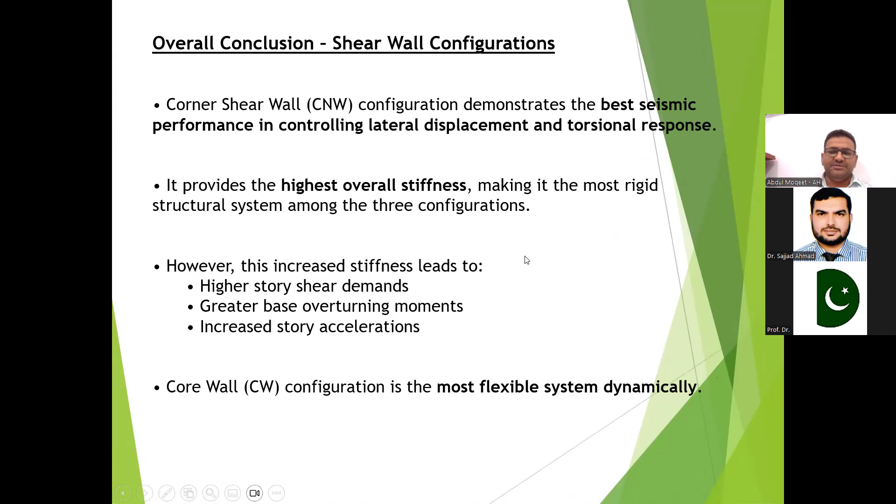And core wall configuration will be the most flexible system dynamically. So as discussed already, core wall will attract low seismic forces and is less effective in controlling lateral and torsional displacement. Edge wall will be the intermediate.

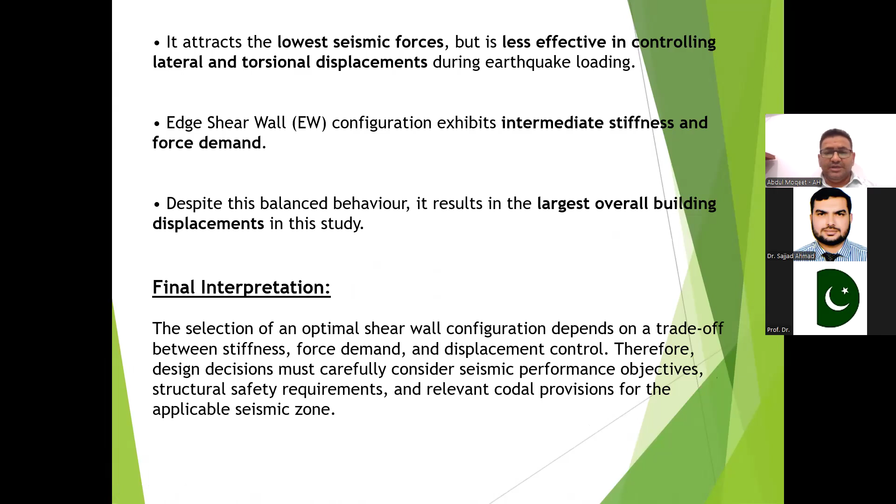So overall, we've discussed everything. The final interpretation is that selection of an optimum shear wall configuration depends on the trade-off between which critical item we are analyzing our building against - stiffness, force demand, or displacement. Therefore, design decisions must carefully consider seismic performance objectives, structural safety requirements, and relevant codal provisions for the applicable seismic zones. So these are the recommendations.

Preference for corner shear wall - this is preferred, as we discussed, since it performs best among these three systems. Corner shear wall configuration should be preferred in projects where lateral displacement control and story drift limitations are critical design requirements. The CNW corner wall system consistently demonstrates superior performance in reducing overall building sway and improving torsional stability under seismic loading.

If we consider the design consideration for higher force demand in corner wall, at the base it is showing approximately 22% higher due to more stresses, and those components should be designed with more care for the foundation, for the links, and everything.

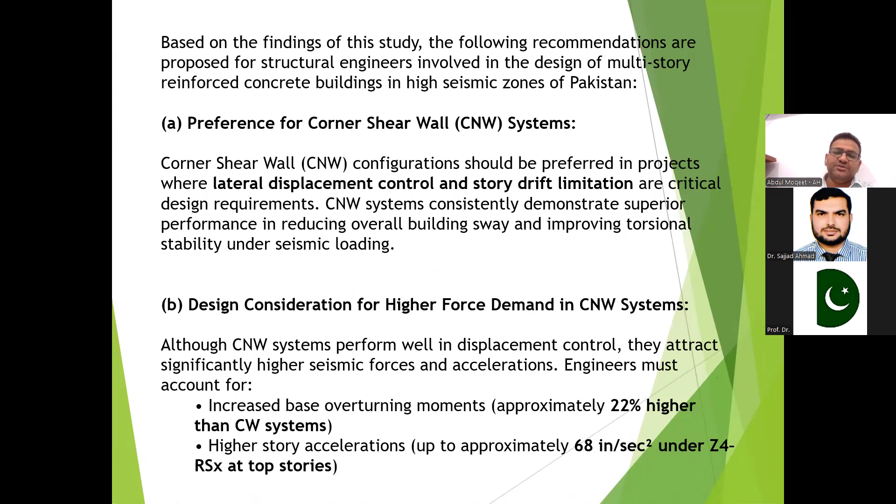And the higher story accelerations are, as we discussed, higher - approximately 68 inches per second square under zone 4 in RSX at the top stories is shown for the corner wall system. And torsional behavior - this was critical in the core wall.

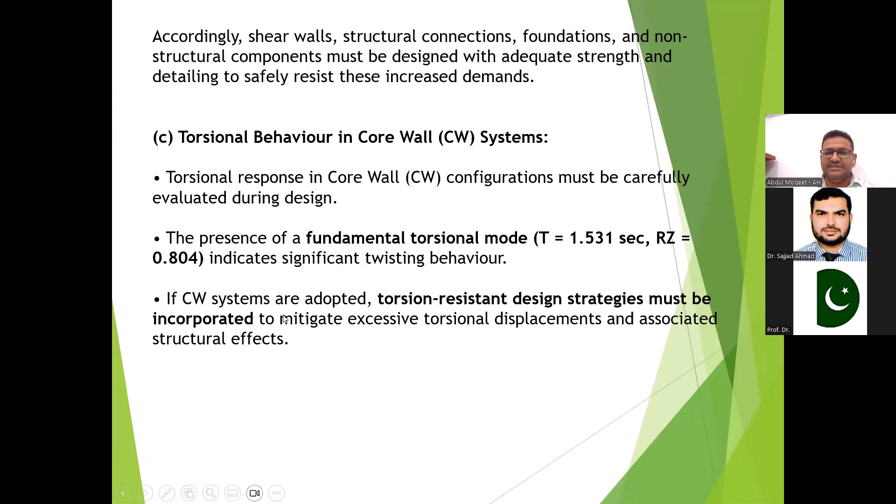So we can discuss the torsional behavior - in core wall configuration, it must be carefully evaluated during design as a fundamental torsional mode. The time period, as we discussed already, is 1.531, and in the Z direction 0.804, indicating significant twisting behavior. So where core wall systems are adopted, torsion-resistant design strategies must be incorporated. Otherwise, these systems show flexible behavior.

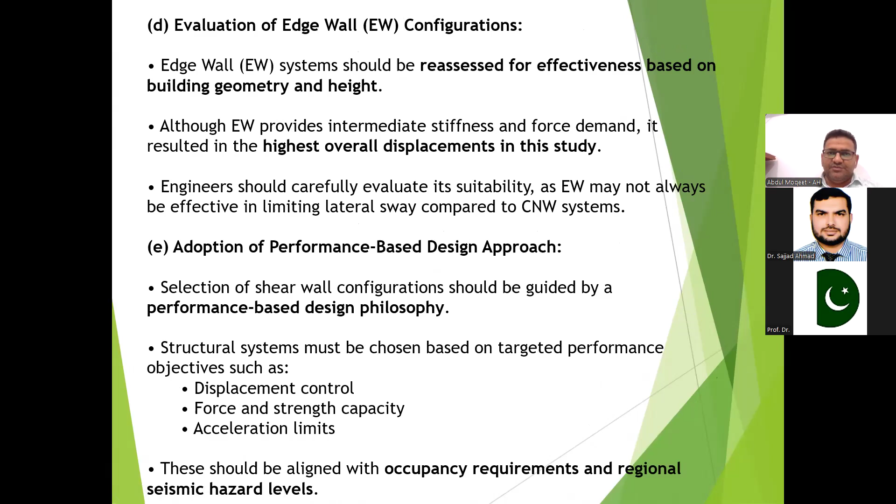Evaluation of edge wall, as discussed already, shows almost intermediate behavior between these two. For that kind of approach, this should be checked again - redo the analysis considering all the different soil types, structure behavior, uniformity, and everything. Basically, our focus in the design was on the corner wall and the core wall, because edge wall is almost showing intermediate behavior, so it should be re-evaluated for the recommendation of future research.

Evaluation of interstory drift ratios for all the configurations to assess localized deformation behavior. Detailed investigation of torsional moments and stress distribution within shear wall systems. For this, we should reevaluate and implement non-linear time history analysis using actual earthquake values, using multiple ground motion records to validate and refine RSA results.

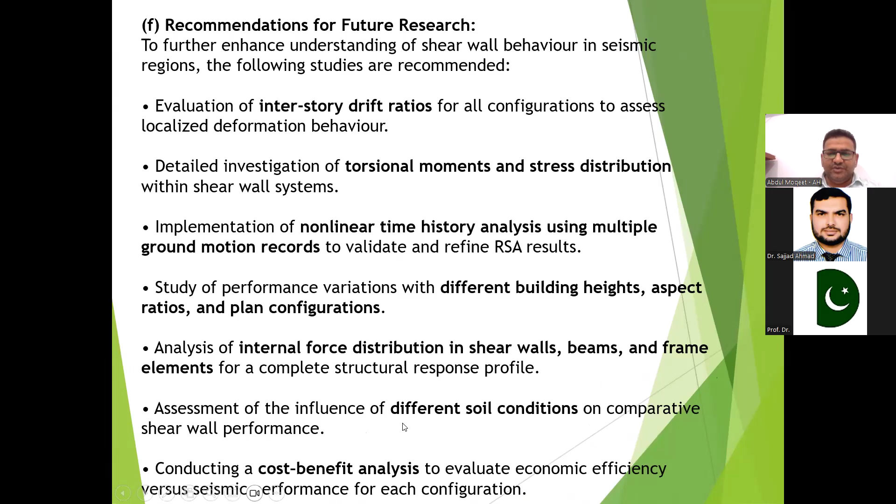Study of performance variation with different building heights and aspect ratios - in different conditions, it should be reevaluated. This is a recommendation for future research, specifically for edge wall, along with conducting a cost-benefit analysis to evaluate economic efficiency versus seismic performance for each configuration.